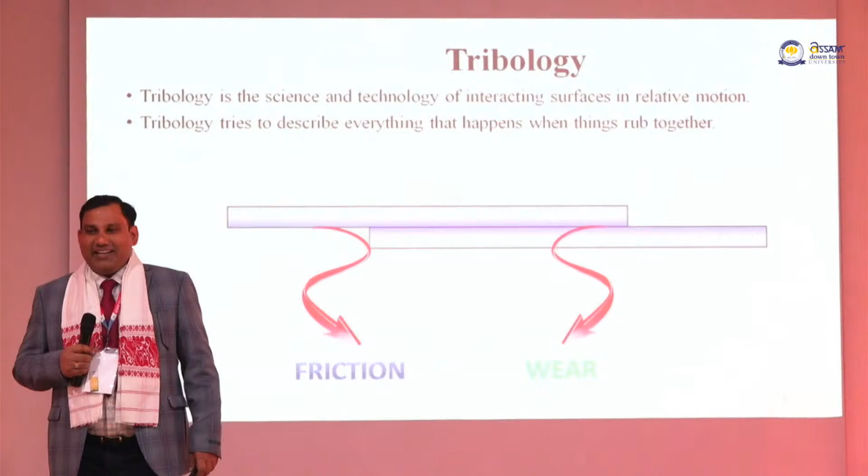In our life also wear and tear happens due to friction. So to cope with that, we can add lubricant in the form of solid, liquid, or semi-solid lubricant. Tribology is nothing but the study of three things: how we can overcome friction, how we can overcome wear, and what type of appropriate lubrication we can add at the interface.

Tribology is related to what you studied in engineering mechanics first year course, the friction, different laws of friction like Amonton's two laws and Coulomb's third law. So that is nothing new, only the name tribology came after 1960, after the Jost report in UK. UK industry formed groups and formulated a report known as the Peter Jost report. Before that it was just friction and wear, but after 1960 the term changed to tribology.

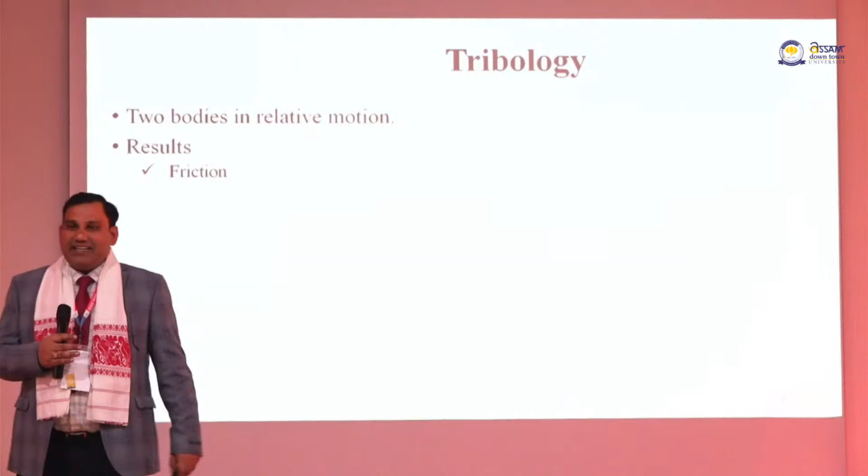When two bodies interact with each other, friction is generated, and due to friction, wear happens. So these are the important things when you are studying tribology.

It is a very important aspect in all fields of engineering, whether you are working as a civil engineer, automotive engineer, or electronics or electrical engineer. Take hard disks, how we can reduce friction in a hard disk, because nowadays mobile phones are also very compact in nature, your hard drive is also very compact. So when things become compact, friction is also very high, and adhesion plays a very important role.

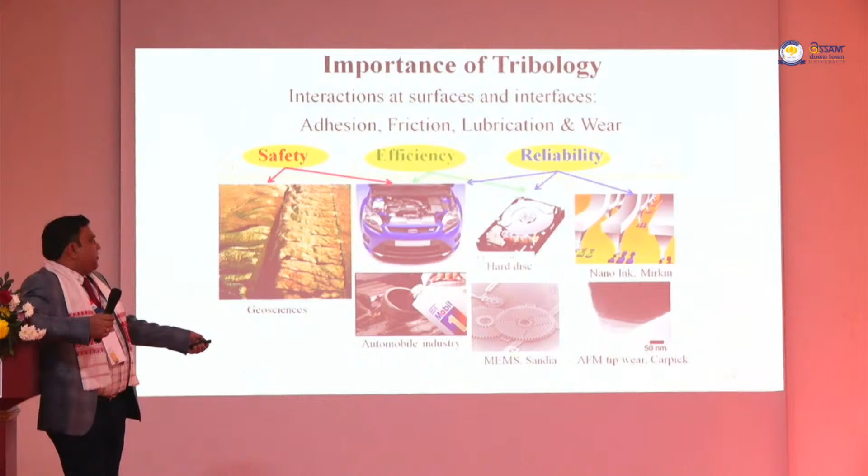So IBM or Intel invest billions of dollars in research to find the perfect lubricant for your hard drive, computer, mobile phones, and watches. Money is invested to reduce this tribological aspect.

Even when using nano-ink or micro-electromechanical systems, the best example is your car's steering and airbag system. When your car impacts something, that MEMS device, which is in nanometers, can immediately open your airbag. But sometimes if there is buildup in that device, even if you hit very hard, your airbag does not open because it is completely stuck.

So when you are talking about the nano scale, van der Waals forces, which are very weak in nature at macro scale, become very significant at nano scale. This is a very important aspect when studying friction and wear in nano scale rather than macro scale. At macro scale we don't worry about van der Waals forces, but at smaller scales, van der Waals forces and hydrogen forces play a very important role in tribology.

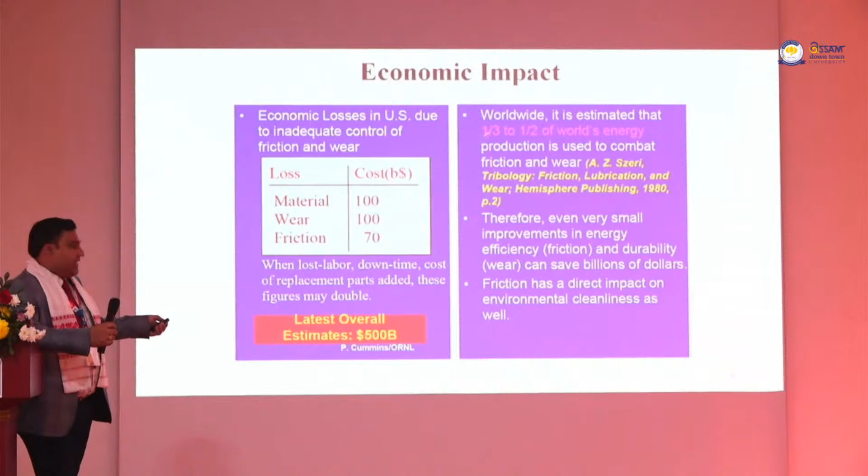This is from an economic impact report published in 2017 by the US. It states that every year, material loss due to friction and wear costs around $100 billion, wear and tear costs $100 billion, and due to friction system spills, maintenance cost is around $70 billion. So when you sum up all these costs, it is around $500 billion loss in a year if you are not targeting the perfect solution for the tribological aspect.

It can be said that approximately one third to half of the world's energy production is consumed due to friction and wear, and this contributes a lot to the GDP of any country. That's why this aspect is also very important when you are working in this area.

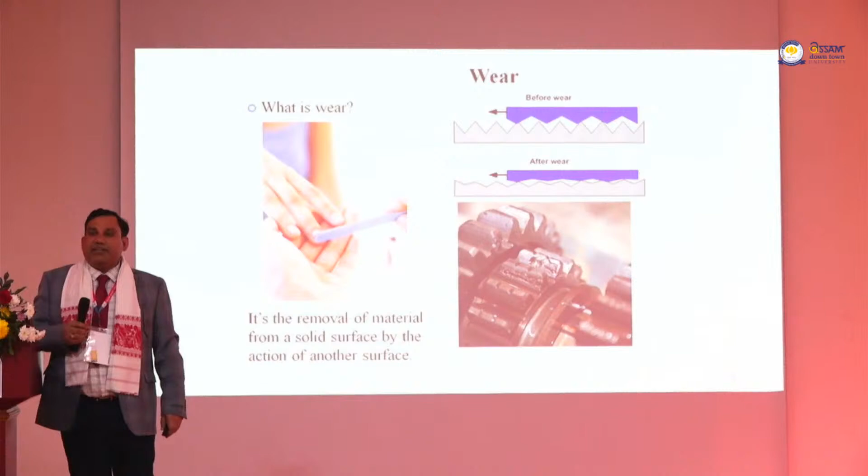After some time, you can feel such cavities due to improper lubrication in your vehicle also. You can feel the sound in your engine after some time because of poor maintenance, because of these types of craters generated over the surface.

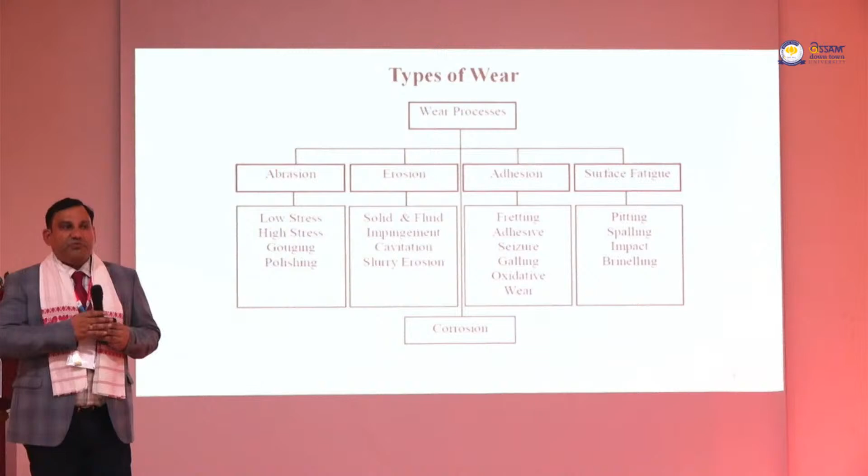There are different types of wear: abrasive wear, adhesive wear, corrosive wear, surface fatigue wear. Surface fatigue is nothing but when cyclic loading is applied, then surface fatigue occurs. In biotribology, it is mostly surface fatigue. Like when you move very frequently, cyclic load is applied on your bone, and after some age you feel pain in your bone. That is called cyclic loading, which is also a kind of wear.

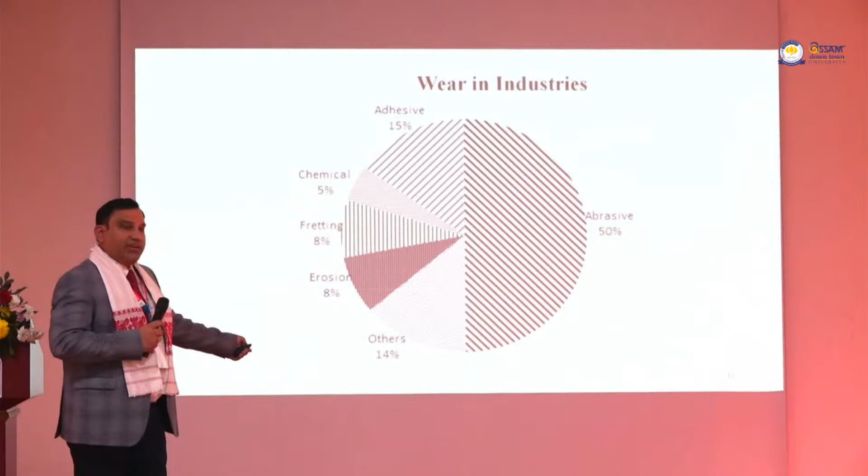When we talk about wear mechanisms, there are two types: two body wear mechanism and three body wear mechanism. The three body wear mechanism is better than the two body wear mechanism because there is less degradation of the surface. From an industry point of view, most industrial equipment fails because of abrasive wear, contributing 50% of maintenance, and adhesive wear only contributes 15%. Others are very less.

From an industry point of view, if you use perfect lubrication between machinery, then you can reduce this 50% maintenance cost. That is a very huge cost in industry.

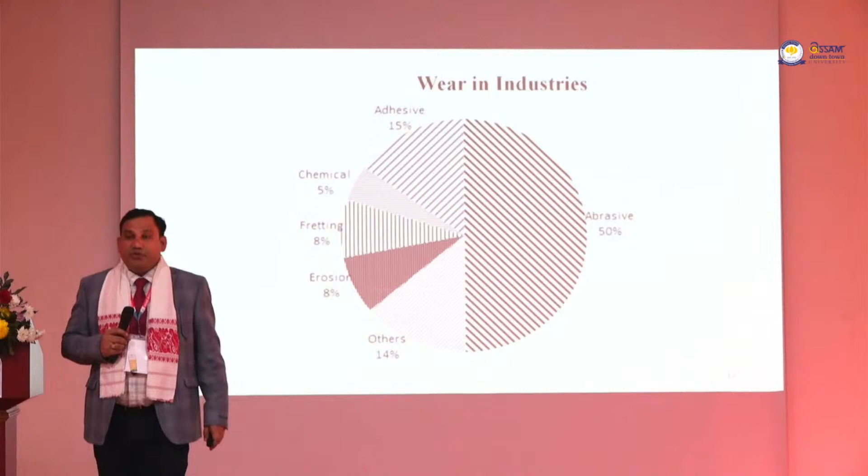Lubrication is nothing but there are different kinds of lubrication you have studied in physics, like elastohydrodynamic lubrication, hydrodynamic lubrication. So I'm not going into detail on that.

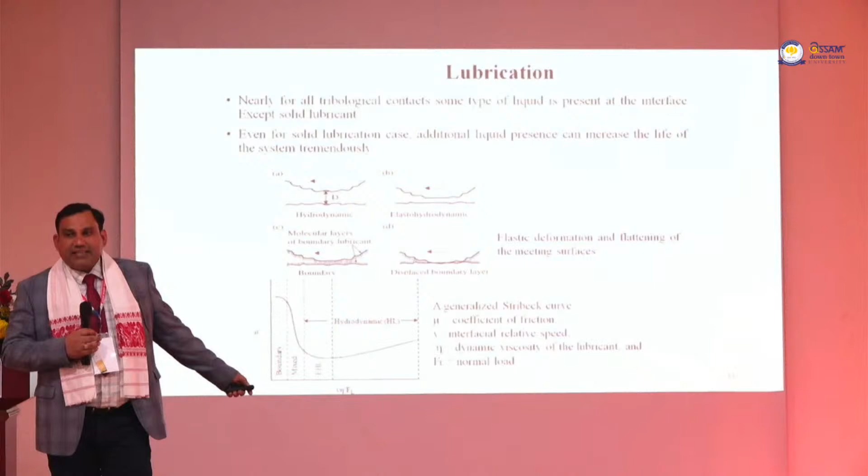This is the Stribeck curve. He is the German scientist, Richard Stribeck, in 1902. He understood the lubrication mechanism in industrial machinery, and he proposed the Stribeck curve showing how friction changes with the viscosity of the lubricant, the applied load over the material, and the velocity at which you're running your machine.

This term is known as the Sommerfeld number. In machine design, most probably you studied this Sommerfeld number, and how friction changes with the Sommerfeld number. That is also another aspect. It was developed in 1942, so relatively recently.

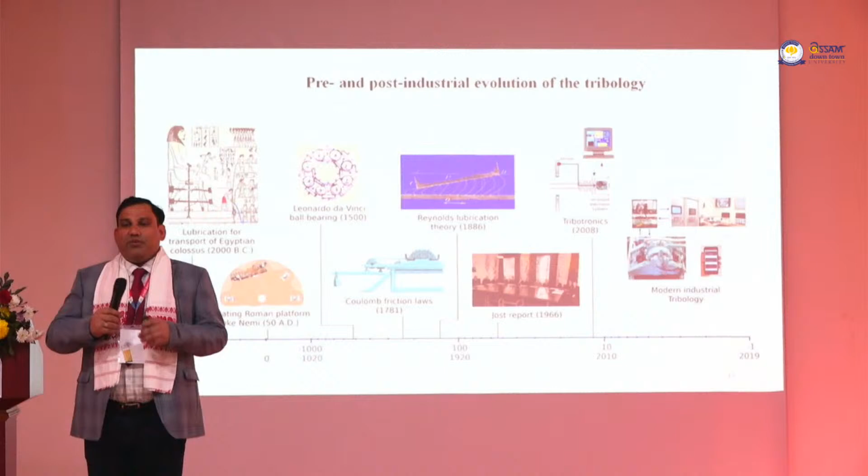We are talking about post-industrial revolution and pre-industrial revolution, how tribology developed from the beginning to nowadays in the 21st century. In the beginning, around 2000 BC, you can see here a person only used wooden cylinder blocks to move items. When you do it slowly, you can move heavy things.

Leonardo da Vinci gave the friction law sketches in 1500. Then Coulomb's friction law came around 1781. Then the Jost report came out in 1966, and the terms friction and wear changed to tribology.

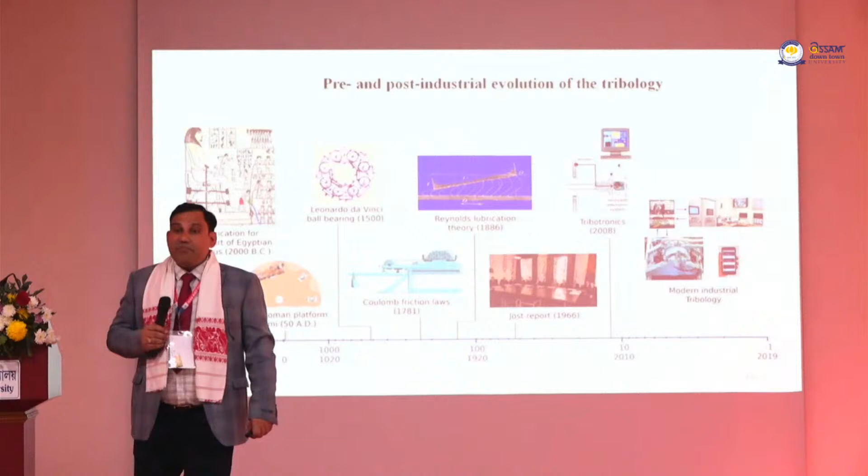After that, around 2008, Tribotronics played an important role. We added tribology with machine learning and artificial intelligence, that's why its name is Tribotronics. Computer science also plays an important role to simulate these tribological problems. Nowadays, in modern industrial tribology, we use Wi-Fi systems or optical fiber networks for condition monitoring of equipment running in industry.

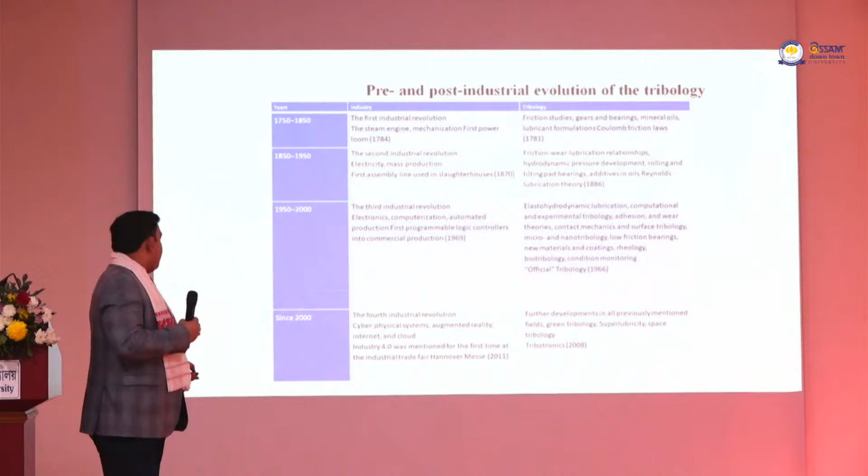Industries, the first industrial revolution came around 1750. So only studies on friction laws were developed in the first industrial revolution, focusing more on gears, bearings, and mineral oils. Slowly, as the industry revolution progressed, tribological aspects also changed day by day. Now we are moving into Industry 4.0, the fourth industrial revolution. Here we have to develop green tribology, super lubricity, and sustainable lubrication so that we can also protect our environment. That is the development in tribology in Industry 4.0.

When we talk about different terms, sometimes we require a high wear rate, sometimes we require low friction. So according to our application, we have to select the proper material needed in our system. For pencils, we require friction, only then can you write on paper. In an eraser, we require maximum wear, only then can you erase from paper. So according to the application, you have to select your material, and then you can play with different compositions and develop new material. That is also a biggest advancement in the tribological field.

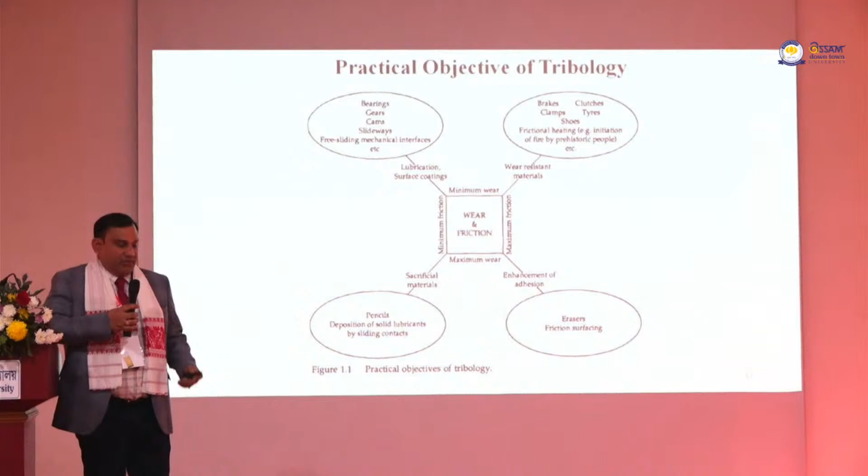So these are the different correlations of different theories developed since Industry 0 to Industry 4.0. Various theories were developed by different scientists, who developed different mathematical models to understand the properties of lubrication, interface, and wear phenomena. Nowadays COMSOL came into the picture, and you can easily simulate the two-body interaction.

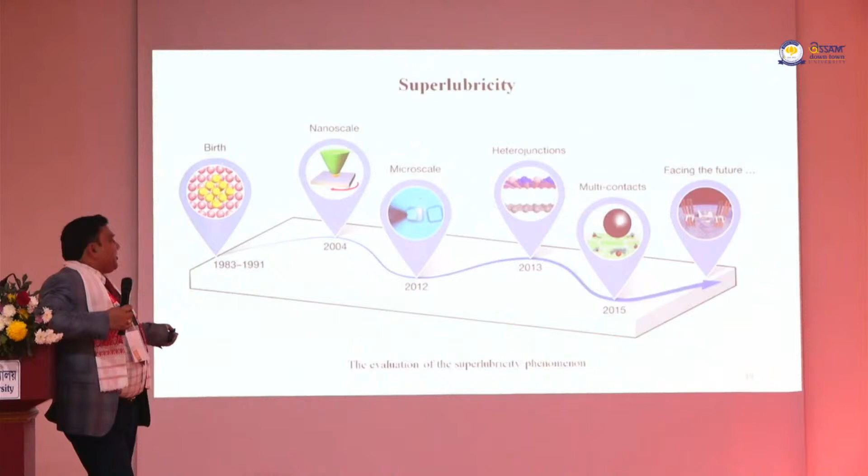Now another phenomena in tribology is super lubricity. This is a very fancy name, super lubricity. It is widely used in space research. When we talk about space, you are developing some satellites. In that state, we require very less friction, only then can your satellite sustain for a longer life. So in space, that is the field of space tribology. ISRO or DRDO has a very dedicated lab for this space tribology in their research center. That is also not developed very early, it was developed in 1983. The birth of super lubricity is 1983.

Now we have to move to different scenarios in super lubricity. Basically we are focusing on liquid based lubrication which can banish your friction, like in our body. In our body, it secretes synovial fluid which creates low friction in your joints. When friction is generated high in your joint, you feel pain, either in your knee or hip joint. The friction in our body is 0.0001. If it is more than that, your body will feel pain because it is not generating sufficient synovial fluid, and your joints come in contact frequently causing pain. So sometimes the doctor will put an injection as a painkiller, which creates a lubricant film over the surface, and you cannot feel any pain in your joints. So that is a kind of lubrication in the body.

This is an example of how we develop super lubricity from nanometer range to meter range, with applications in real life. When we talk about electrical connectors in railways, this requires super lubricity so that the railway wagon can be moved very frequently. If friction is high, it cannot be moved, it can stick with the wire. So in this area super lubricity is required. Bearing areas also require super lubricity, because most components used in a spacecraft use so many bearings, and those bearings need to move with less friction, only then can it sustain in space, because maintenance cost there is very high. These are the different applications of super lubricity from nano scale to macro scale.

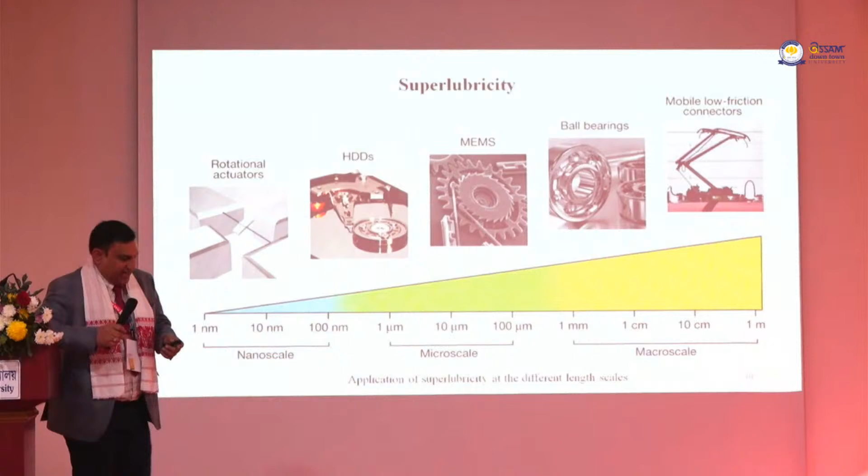Another area is in situ lubrication, where in a smaller or nano scale component like MEMS or hard drive, we can't use any external lubricant. So we have to generate a coating which can self lubricate at the interface. This is known as self lubricating coatings.

Here I have developed a polymer. In that polymer coating, I have added some weight percentage of perfluoropolyether lubricant, and you can clearly see that after 4 lakh number of cycles, even though there is no displacement of the material, only the top layer of the lubricant displaces.

So these are the samples. You can clearly see at the interface the lubricant film which is perfectly there. So after 4 lakh number of cycles running continuously for 24 hours, the samples did not fail.

That is the kind of in situ lubrication used in your hard disk, mobile phones, because there you can't give any external source of lubricant. It is an internal source. When your lubricant runs out, your hard drive will crash, your computer will crash, even your motherboard can crash, because of improper lubrication. So that is the principal lubrication mechanism.

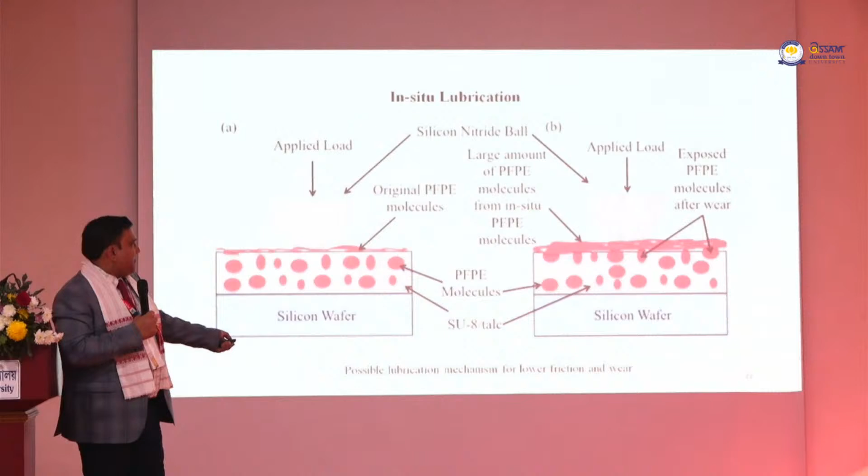When you apply the load, whatever lubricant is there inside the matrix comes out and makes the tribo film. So that is the simple schematic mechanism we have proposed for that particular in situ lubrication.

As I told you, space tribology is another field of tribology that can impact humans widely. We are using solid lubricant and liquid lubricant in space research centers to reduce the friction between components. Then another widely used area of tribology is human biotribology.

Metals cannot sustain in our body, and they can become toxic in nature, and you can get some other type of disease in your body when metal interacts with your tissues. So we are mostly using polymer nowadays as a coating to replace metals at direct contact with your body tissues. That is the field of biotribology.

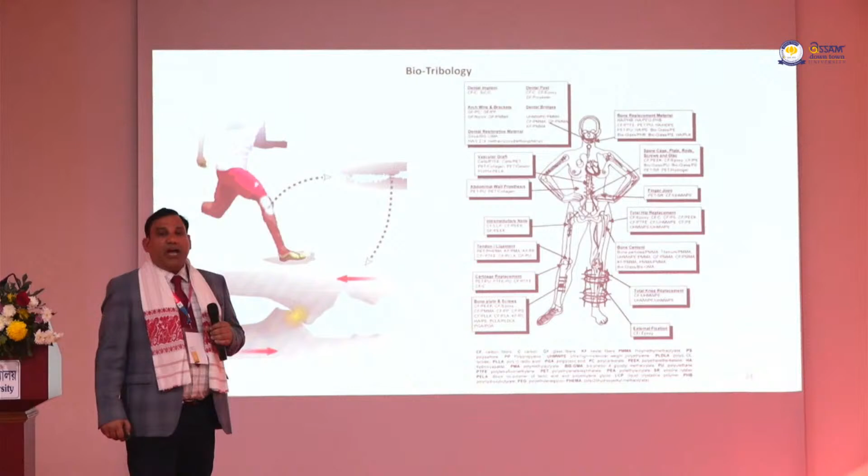When any person is running very fast, after some age, he can get an arthritis problem, because your synovial fluid, which is generated, and your bones get completely stuck with the surface of another bone. These two bones, like the femoral bone and the bottom bone, interact and become joined. It is kind of cold welding, and when you apply more force, you feel so much pain you can't move your leg.

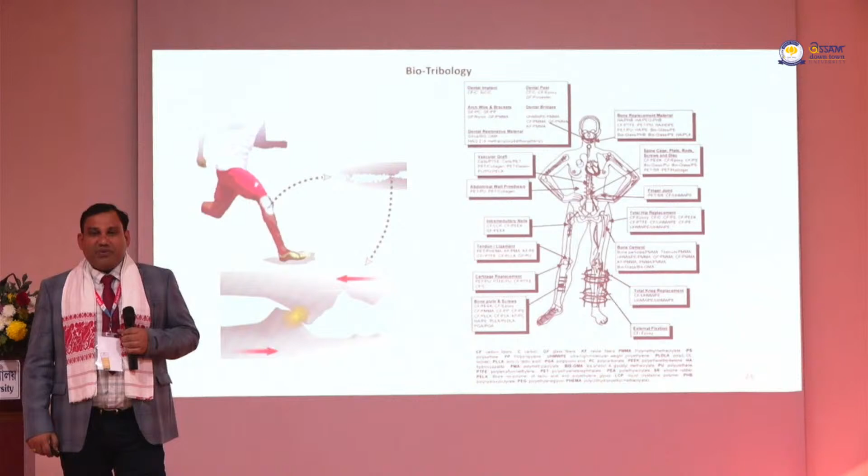So runners who run very fast, or fast bowlers, always have to get operations on their knee or these types of joints very frequently, after 5 or 6 years, because their bones become completely cold welded to each other and cause pain. So that is the kind of biotribology.

That's why I'm telling you tribology is an interdisciplinary field, and you can enjoy tribology because it is a very interesting field also. Another thing you never thought about is how much nature gives you ideas - that is biomimetics. Nowadays biomimetics also plays an important role in developing biomimetic surfaces.

Here you can see a lotus leaf, with such nanotextures present, and the lotus leaf has self cleaning properties. If you just drop something, it cannot stick to the lotus leaf. Because of this...

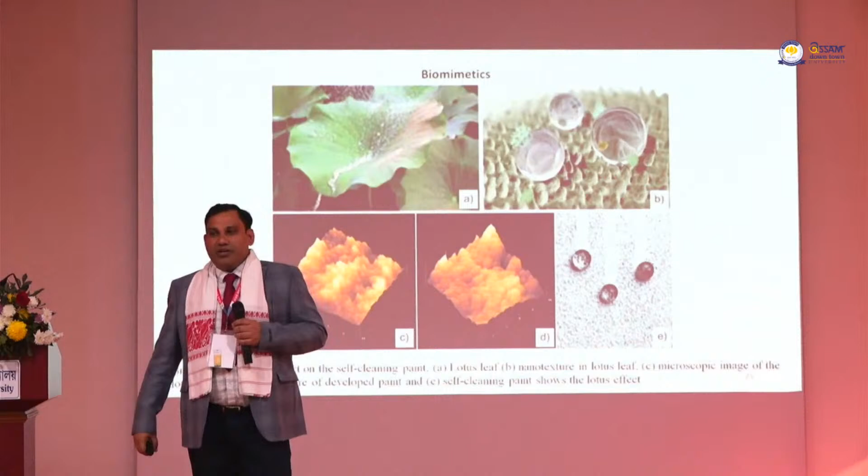Whatever we have seen in nature, as humans we have developed so many things like self-cleaning paint. Nowadays advertisements are also coming for self-cleaning paint - no dust will stick to your paint. Companies are doing so much in that particular paint. Another is called self-cleaning glass.

If your building is 20 stories, or 25, 30, 150 stories, how can you clean the glass from outside? So we just use these self-cleaning hydrophobic coatings. It is directly self cleaning - you just drop water and it cleans, and nothing sticks over the surface. So that is one example.

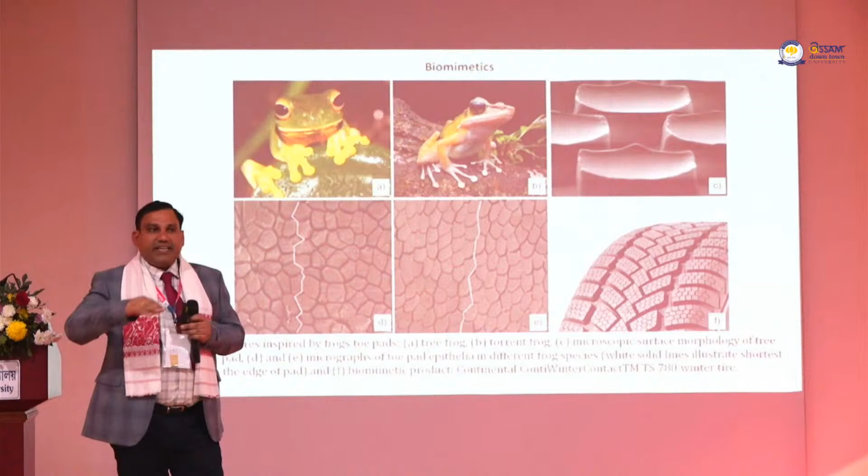Another example you can see here is the frog. This gives the idea for tire design. When you look carefully at your automobile, you can see the rear tire texture is different than the front tire texture. This is another application of biomimetics because it can stick anywhere - so that your tires stay stuck to the surface and don't skid, otherwise you can feel more slipping. That is another area where you can see these types of textures in your tires.

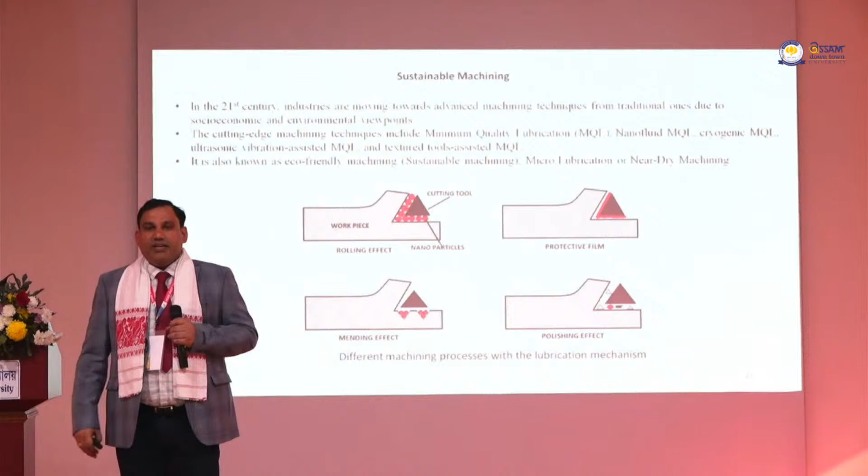This area is also very important, and so much studies are going on developing different bio cutting fluids, different surfaces of tools through biomimetics. That is another area of sustainable machining.

And then the last area I can say is electric vehicles, which are becoming popular, and a lot of research is happening in electric vehicles.

These are the areas where tribology plays an important role, like when you purchase a battery. Your battery life depends on this because electrons are flowing, and this can corrode the material. Battery cells will be corroded faster, so we have to develop battery cells and fuel cells so that they cannot be corroded.

If your battery life and maintenance is reduced, that's significant because 80% of the power is generated by the battery. If your battery life is only one year, then every year you spend more money to run your electric vehicle.

Another aspect in electric vehicles is the steering system, because there is no IC engine there. So in the steering system, there is a lot of friction - how do you control your steering system? Then electric motors - how do you control your roller bearings, your windings, whatever windings you are doing in the electric motor - that is also very important. There, electric friction plays an important role in electric windings.

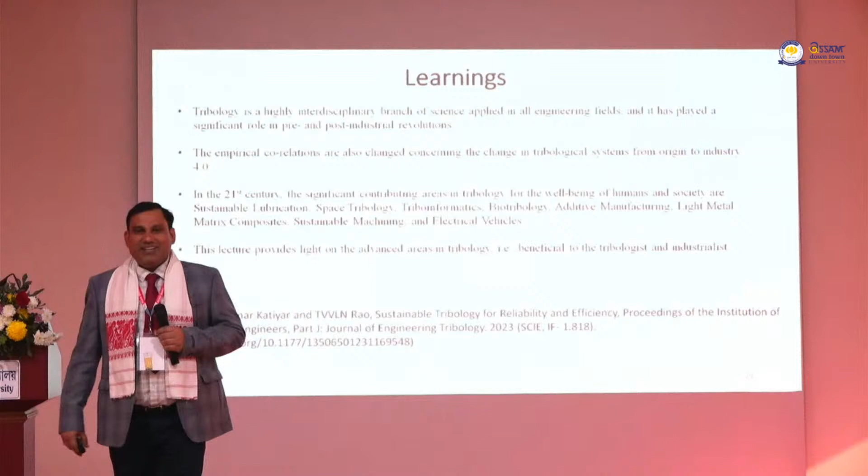Thank you very much for patiently listening after lunch. That is a very tedious task, to wake up everyone after lunch.

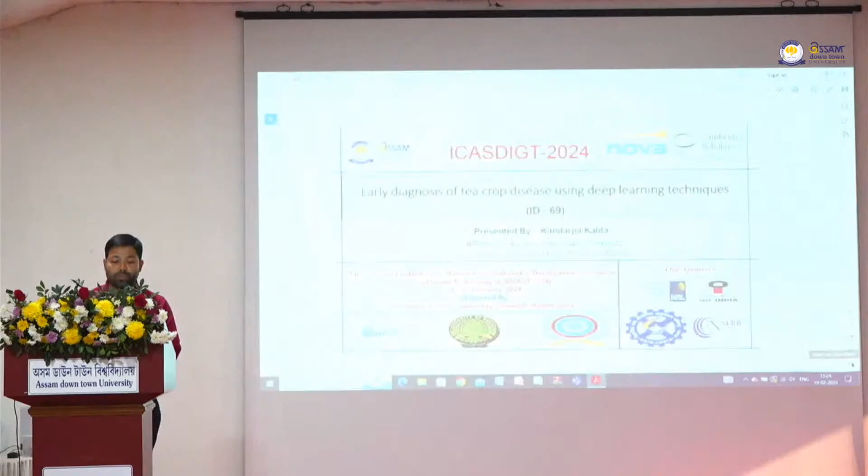Thank you, ma'am. Respected chairperson, co-chair, dignitaries, fellow researchers, and my colleagues. Myself, Kandarpa Kalita from Assam Downtown University. For the last few months I have been working on this topic, early diagnosis of tea crop diseases using deep learning techniques. As a part of this research work, I have received some results, and I would like to present these results and my findings at this conference platform. This paper is co-authored by Dr. Aniruddha Deka sir and Professor Sunandan Borua sir.

This is the outline of my presentation. I will start with the introduction, problem description, objective of this work, then the methodology I've applied, then the findings of my research work, the conclusion, and then some references.

In the introduction, whenever I look at the different crops grown across the country, tea is one of the crops grown mostly in the northeastern area, and you can say that most of the tea produced worldwide, a major chunk comes from our land here. So there is a need for some attention to be given to that crop, which is useful for better yield.

When I visit different tea estates throughout the state, I find that although farmers are choosing the best variety of crop to be planted in the garden and giving the best care, due to some different factors, it may be environmental or any other, tea crops are very much prone to diseases and different insects infect those crops.

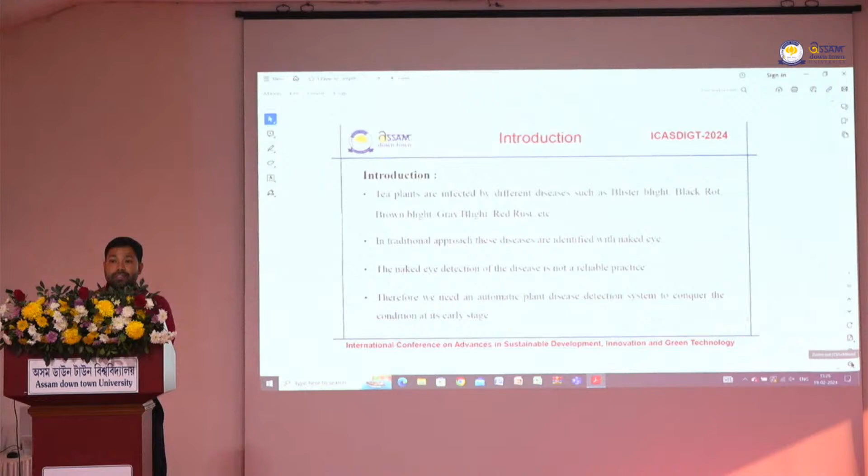So in today's days, if we go to the crop, we'll find that all this disease detection and whatever recommendation for remedies are there, these are all based on traditional approaches. Expert farmers and plant pathologists visit that place, and using the naked eye, they identify the symptoms, and accordingly identify the disease and the recommended remedies.

These practices are useful or workable if the number of areas where tea is planted is less. But in practical terms, we can see that as tea is an important crop throughout the world, the number of areas where cultivation is going on is increasing. So this naked eye or traditional practice is not a fruitful one.

So to overcome this problem, we can say one automatic system is the need of the hour. One automatic system, maybe based on an Android mobile phone, will capture the image, and based on the analysis it will tell us what disease this is and what will be the recommended remedy for the disease to be conquered.

During my study, I find that the Plant Protection Code, which is a body formed by the FSSAI from Government of India, has made it obligatory that a product, it may be tea or any other, can go to the market only if the number of chemical residue or pesticide residue is within a permissible limit. But we find that if that residue is not up to that mark, then the entire product is going to be rejected.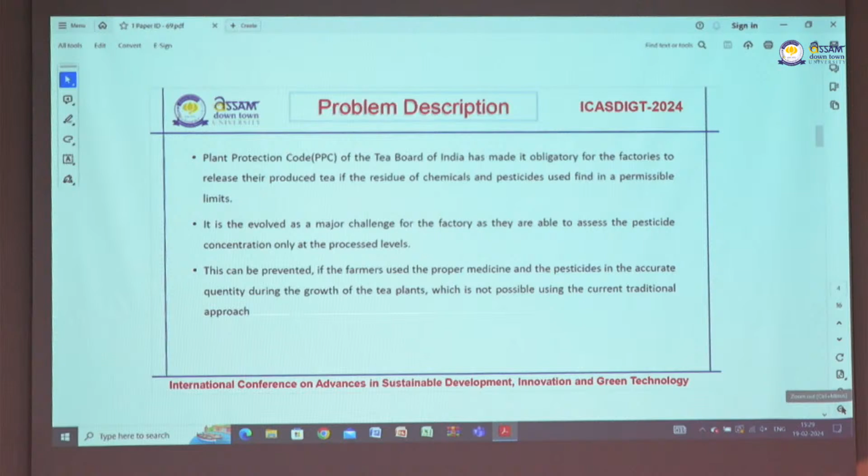Towards the mitigation of this problem, we can suggest that if the farmer knows in which quantity the pesticide should be sprayed, then this type of problem can be mitigated. So actually this is the core aim of this research work.

In this work, I'm in the middle of my PhD work. Right now I'm trying with different existing convolution neural networks, which are used for the classification of this type of problem statement. Here I'm applying 3 transfer learning architectures: AlexNet, Inception V3, and faster RCNN. During my literature study, I find that these 3 transfer learning methods give us the maximum number of results in case of the tea leaf.

Apart from these 3, one traditional architecture is also used: this is support vector machine. As a part of my research work, I have applied all these models to my dataset and found some results, which I want to present before the audience.

As a part of the methodology, first of all, I have to collect the dataset, because as it is an image processing problem, without images we cannot go for this. As a part of the dataset creation, I have collected a dataset which is publicly available in the Mendeley dataset, consisting of 120 images of this dimension.

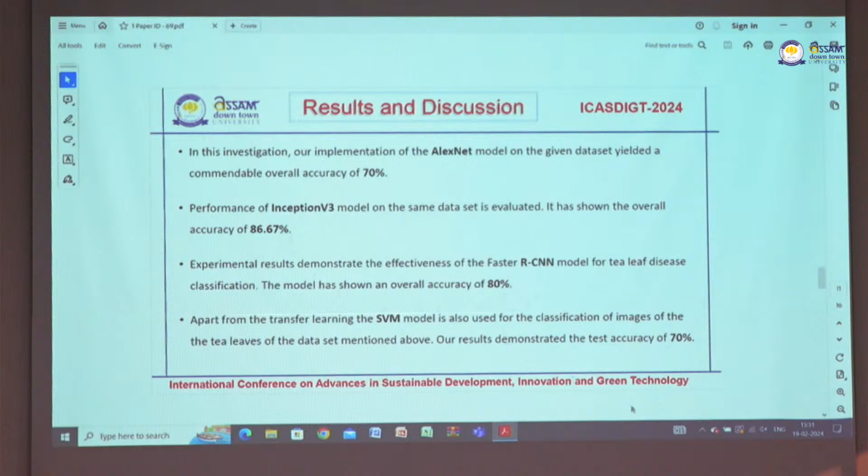The model applied is the SVM, next AlexNet, Inception V3, and Faster RCNN. I find that AlexNet architecture produced 70% accuracy in the validation, and among all four architectures, Inception V3 shows the best result, which is 86.67%.

As a conclusion, I can say that Inception V3 gives the best result - sorry for the mistake, it should be 87 or something like this. So this is all about the paper. These are a few of the references I've used. Thank you.

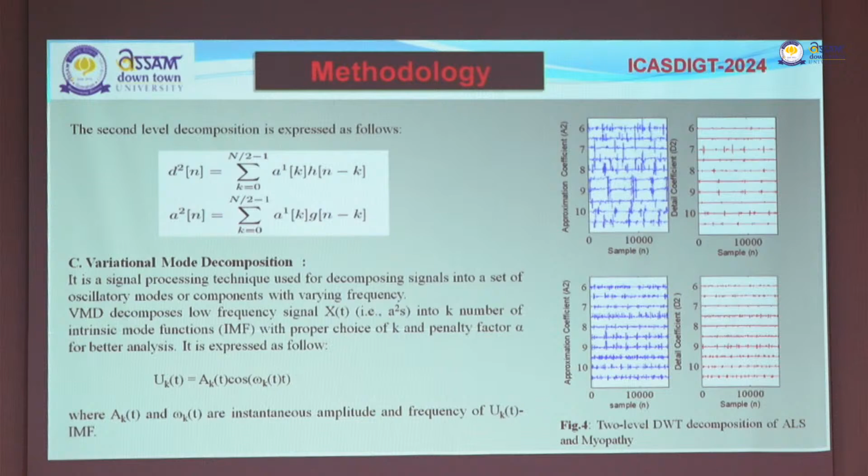From our research, we found that using DWT with VMD can improve the decomposition quality, enhancing multi-scale analysis and facilitating interpretation of the signal.

These are the references. Thank you.

Thank you very much. So any question from the audience? No question? Okay, fine. Let me ask you one question only.

You are the PhD scholar. Yes, sir. So you have taken wavelet transform. Yes. Also you have taken VMD. Yes, sir. Have you heard about EMD? Yes, sir. So what is the difference between these two?

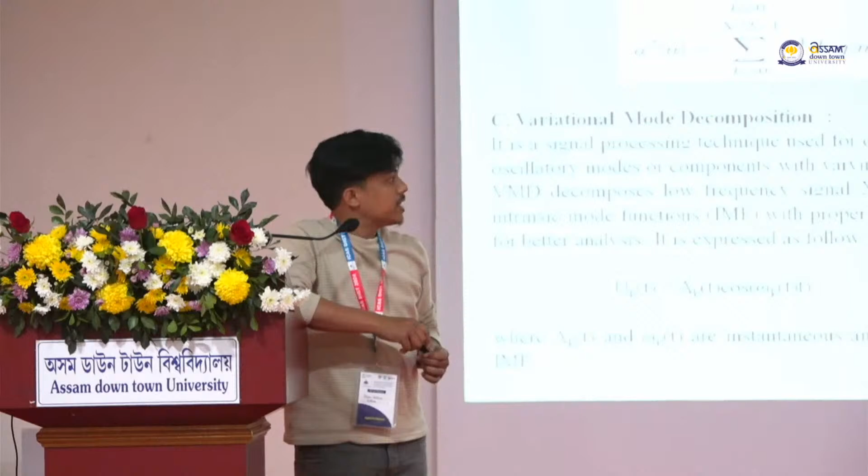Second thing, you have taken wavelet. Yes, sir. 2-level decomposition you have taken. Yes, sir. Am I correct? Yes. So next you have taken VMD. Yes, sir. Why? Sir, so that the DWT is sufficient to generate the features. Then why VMD again? Sir, for finding the fine frequencies, fine frequency mode level, for finding that.

Please check again. You are the PhD scholar, no? Okay, sir. Please check again. You see DWT, if you are considering, what is the mother wavelet you have considered there? DB4, sir.

DB4, you can check with biorthogonal. You can get a better result for biomedical signals. Yes, sir, could you follow me? And if you want to take VMD, please consider EMD first, compare it with VMD, not DWT with VMD.

So if you have taken the DWT components, have you obtained the IMFs from the raw signal? Not the raw signal, we have first used the DWT. You see the IMFs, those are not the IMF, sir. Right side, what are those? These are the signals collected from the DWT.

No, right side red signals, what are those? For detail coefficient with high frequency, we have negated these signals. High frequency, from where did you get it? EMD has no high frequency. What is the highest frequency, sir, in EMD? From the raw signal, we have collected this.

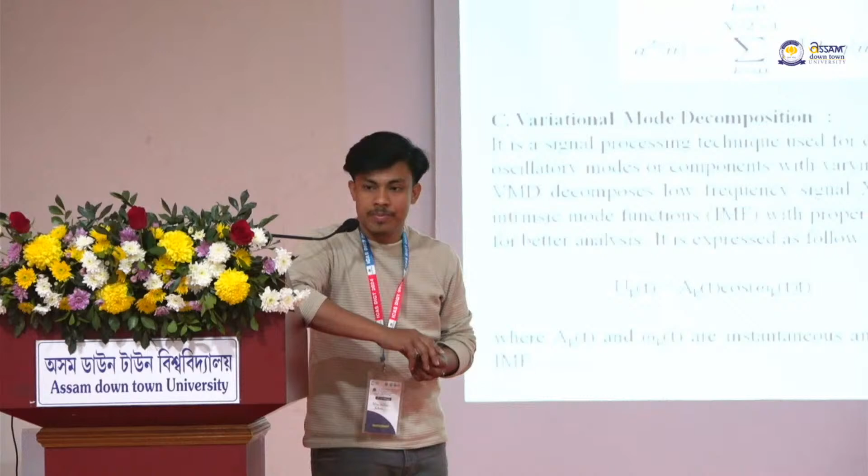So as per my knowledge, correct me if I am wrong, the frequency signals are denoted by capital X of either e to the power j omega, or omega, whatever. So you cannot write capital X of t, where t is the independent variable there. If t is there, that means that's a time domain signal. Correct me if I am wrong. Yes, ma'am. Okay, so if that is the case, I think you should correct that. Okay, ma'am, thank you. Okay.

Please check, can you go to your conclusion and results slide once again? Okay, my question is, the first point which you have written is that you are integrated into several ensemble learning models. No, ma'am. Okay, so basically are you using all of them together as an ensemble? That point is not clear. No, ma'am, we have not used them all together, we check it separately.

Because KNN inherently, if you use it as a single model, is not an ensemble. So are you using several KNNs together, is that what you mean? Yes, ma'am. Okay, so that needs to be put better, because it's not very clear. Okay, ma'am. Thank you, everyone.

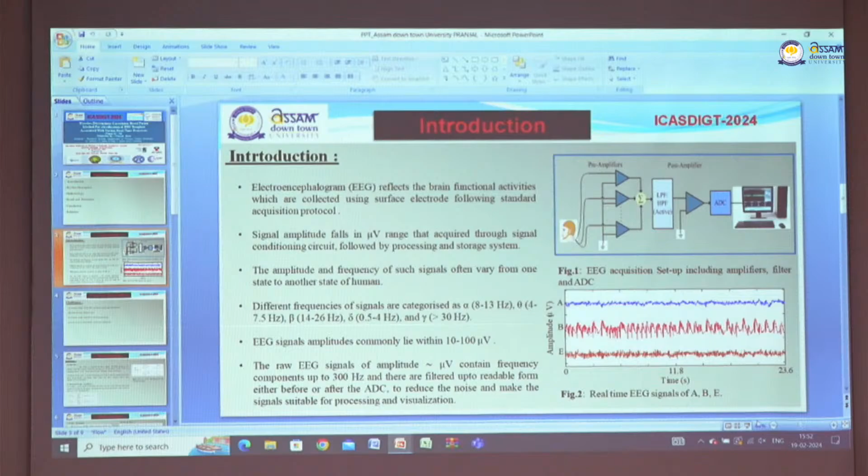First, the signal is collected from the brain and fed to the pre-amplifiers. Pre-amplifiers are needed because brain signals are very low in voltage, so they have to be amplified to make them readable and feasible. After the pre-amplifying stage, the signal is composed, meaning combined to form a single data stream.

That data is fed to high frequency or low frequency active filters, which separate the signals into high and low frequency to reduce noise. Then, after analog to digital conversion, it's fed to the computer screen and analyzed with the help of MATLAB and other software developed for analysis of EEG signals.

Now, the next question is, what are the challenges in the study? The first challenge is the involvement of a large volume of data associated with real-time measurement. That means when we collect the data, there are a large number of frequency signals containing many features which are different in character.

The next challenge is high dimensionality of feature space, where features are more than the observations. Some signals contain frequencies which are really needed, some are of less importance, and some are not important at all, but all are contained in the same frequency domain. That's why it's called high dimensionality data, and this is one of the challenges: to collect less data to find more results. The third one is the involvement of large constraints in existing methodology.

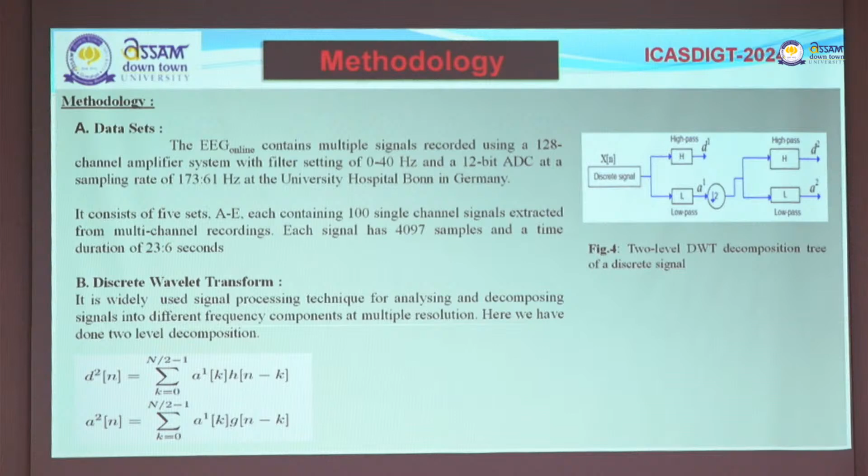A 3-fold cross-validation strategy is applied, where 1 set is used for feature extraction and the rest 2 sets are used for model performance, using advanced ensemble performance boosting, bagging, and boosting, an RS model embedded with CC and DAC based statistical features. That means statistical features are used to check whether reliability is increased, remains the same, or is enhanced.

To set this up, some statistical measures are taken: ANN, rotation forest, random forest, classification and regression tree, decision tree, k-nearest neighbor, deep learning, C4.5, LADT, etc. By introducing strategies like bagging and boosting.

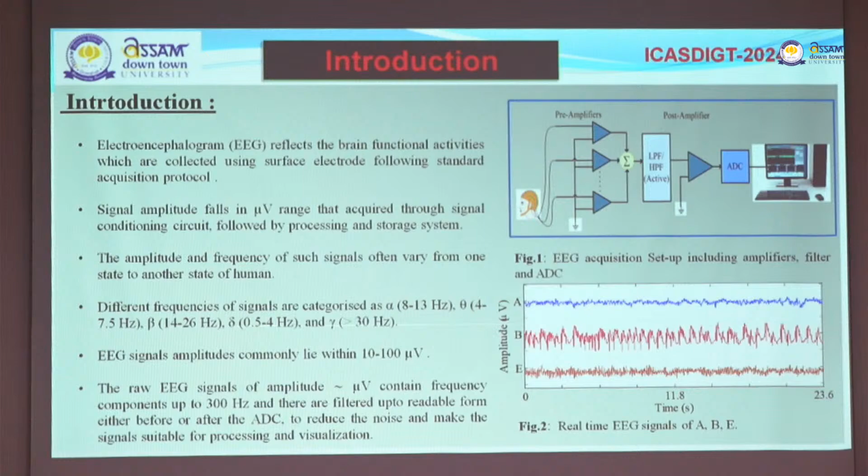Because everyone is using it, I'd like to know why. Why have we used the discrete wavelet transform? No, why do you use the wavelet transform? So what is advantageous about it? What is it, sir? Right, I understand this one - what is the advantage of using the discrete wavelet transform?

Wavelet transforms are used to separate the signals required for analysis of EEG signals. Let me make this question simpler. So you have used DWT. What are the other methods that can be used in place of DWT, and why do you consider DWT superior to all the other methods?

Is it clear now? Clear, but madam, I have only used this method, DWT, because I am at a very early stage of my research. I only used DWT. Now what other methods are there? Can you tell me?

WT, DWT, FWT. Another method is FWT. No, what such transforms like wavelet transform you have not used, that's fine, but what other transforms do you know? Fourier transform, wavelet transform.

In recent years, there have been very catastrophic effects by earthquakes all over the world, challenging the civil engineering community to move toward performance-based design, where risk and losses are predicted to improve building functionality. Seismic-based design codes have been adopted recently worldwide, but prior to that, we had non-ductile buildings.

These buildings were designed before seismic codes were introduced, so they are at very high risk when exposed to seismic forces. Also, over their service life, they are exposed to deterioration such as environmental stresses, and the risk increases multifold when exposed to earthquakes. So identifying performance limits of these structures is necessary so we can plan repair and retrofit.

Coming to environmental stresses, chloride-induced corrosion is one of the major factors affecting RC structures near coastlines. It can lead to rust formation in the reinforcement, causing volumetric expansion inside the concrete that reduces the cross-sectional area of the reinforcement bar and effectively reduces the cover, leading to cover cracking and spalling of the cover concrete.

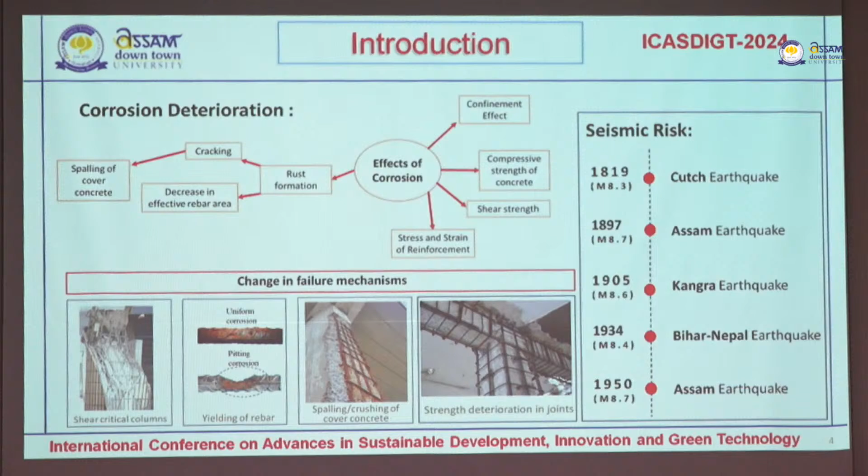Sorry to interrupt you, but could you just pass over these things and move on to your results slide? Okay, yeah.

I have adopted finite element modeling to do the analysis. Here we identify performance levels based on local damages, which are mapped to global damages based on slight, moderate, extensive, and complete damage states. We consider various input parameters, including concrete strength, reinforcement strength, and mass loss, to correlate with the damage limit states.

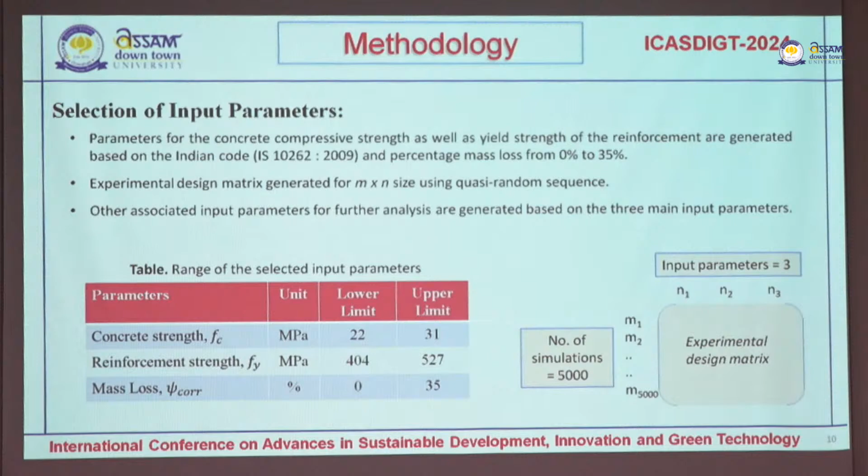We used these input parameters with 5,000 simulations to generate the parameters. After generating the damage states, which are correlated with global damages, we developed simple prediction models helpful for regulatory authorities and common people, using compressive strength, reinforcement yield strength, and corrosion level to predict damage levels.

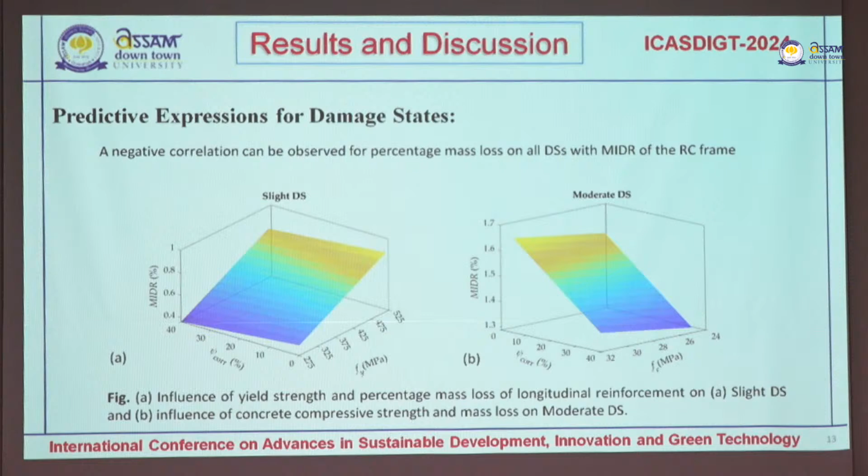Using this prediction model, we applied polynomial response fitting models. Here we see the correlation between yield strength and mass loss due to corrosion, which correlates to the maximum interstory drift level that maps to the damage state for both slight and moderate damage states.

Thank you so much. So, any question? No question? No.

So, what is the model you have used here? We have used a polynomial response surface fitting model.

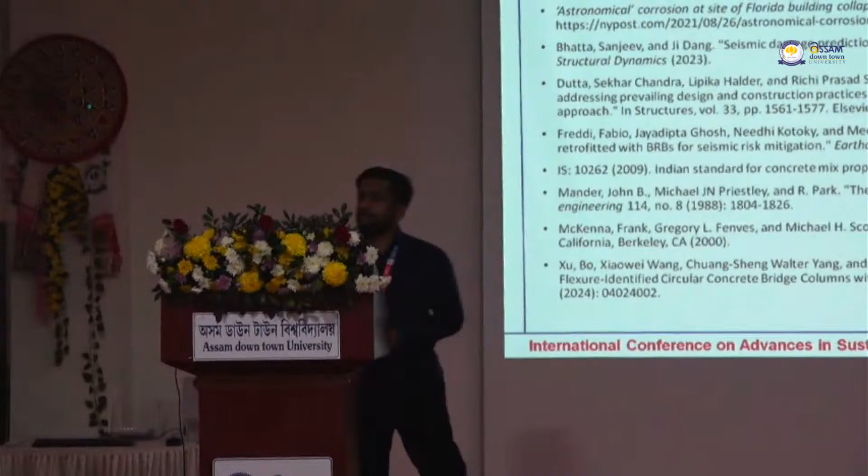Go to that model, please. I have explained the model here. It's the expression we have developed. Polynomial response surface model.

What is your platform of work? What is the software you have used here? MATLAB, sir.

But how is it related to finite element method? Here we have used parameters where we consider variations - compressive strength, concrete reinforcement strength, and corrosion level. We have tried to map it to certain levels of structural damage. Using these parameters, we can predict the structural damage that is intended to happen in a building, as per the corrosion level and the variation in material properties. For that, we have used finite element modeling to do the simulation, because experimentally it's not feasible.

We have tried to simulate 5,000 simulations of the finite element model where we generate the damage limit state, and we try to train the model.

But you can change that polynomial part to exponential as well. In future, that could give even better results. Okay, thank you very much. Thanks.

First, let us have some idea from where I belong. I belong to the State Technical University of Uttar Pradesh, one of the largest affiliating technical universities of India. We have more than 750 colleges affiliated with us all across UP.

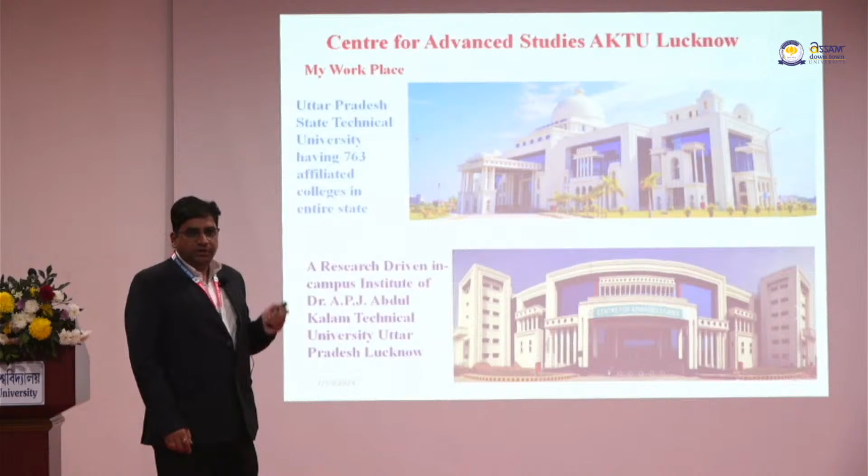This is the center where I am working, located in its own campus. The upper one is the administrative block, the lower one is the Center for Advanced Studies, where we have PG and PhD programs. I am Dean Academics of this particular center.

We have MTech in Mechatronics. All the PG programs are interdisciplinary programs. We also have a PhD program in our own center, where we give one of the highest scholarships to students per month. These are the research labs.

Google has invested 1 lakh US dollars in our campus to establish its own lab, the Google Developers Code Lab. This is the artificial intelligence lab with a 5 petaflop server. We also have nano centers. So we have more than 17 state-of-the-art research labs, and we do research in all these areas with the help of MTech and PhD students.

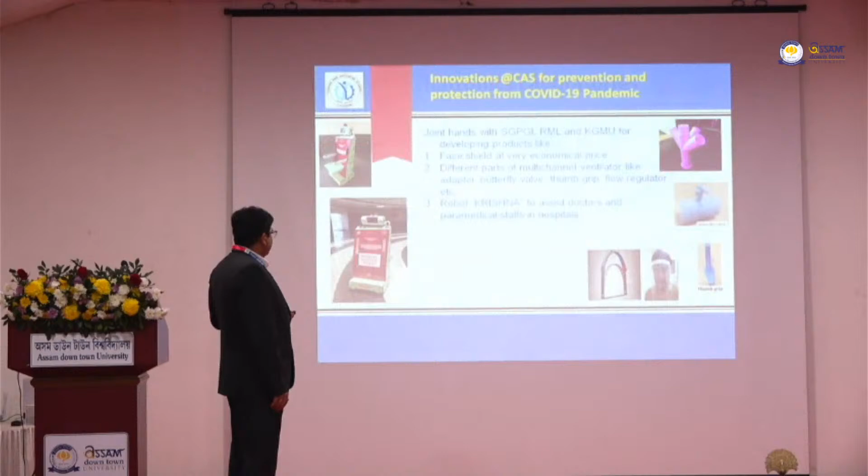Let us come back to the topic, keeping in mind the time constraints. So what is nanotechnology? Everybody knows nano means 10 raised to the power minus 9 meters. If we measure anything that can be treated as nanotechnology, any one of the dimensions should fall in this particular category, it should be less than 100 nanometers.

I am talking about the application of nanotechnology in the machining area. Nanotechnology has a lot of applications in all areas. You can do nano coating on fruits and vegetables just to increase their life. You can make a coating of nanotechnology, a nanofilm, over any particular body to make that body wear resistant and scratch resistant, etc.

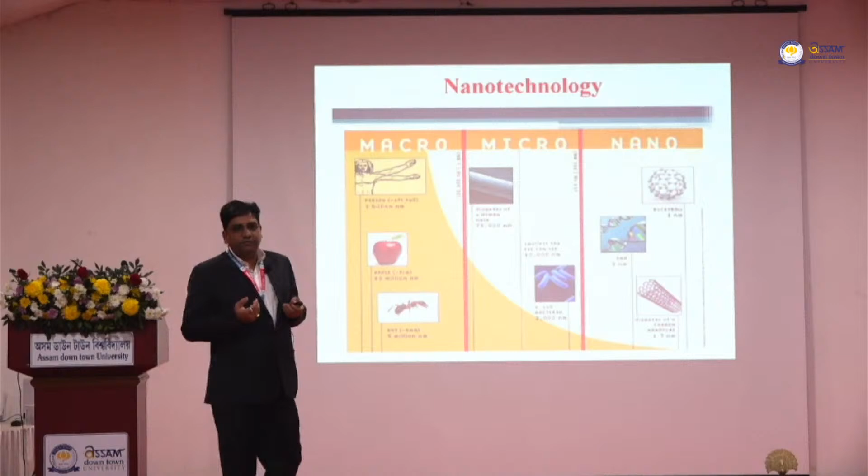Nanotechnology has a lot of applications in the medical field also, but I have tried to find out the way by which we can make the cutting fluid more sustainable and move towards the green technology goals.

Everybody from a mechanical background might have some idea how the turning operation is done on the lathe machine. There is a relative motion between the cutting tool and the workpiece. In turning, we keep our workpiece rotating while we keep the cutting tool stationary, having only rectilinear motion, so that we can have a shear action of the material and material is removed.

There are 3 basic zones in which heat is generated. Our aim is to minimize the heat generation, or to keep it within the permissible limit, so that we can keep the sharpness of the tool at a particular level, to enhance tool life and reduce tool wear.

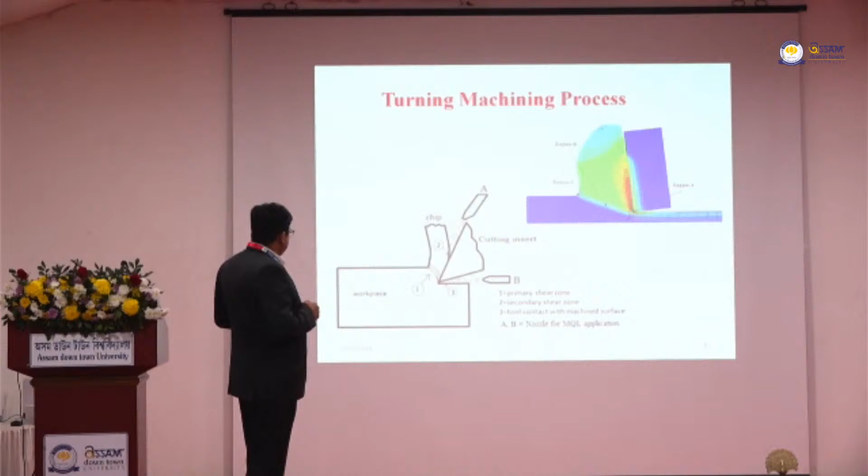The important zone is the primary shear zone, where the maximum shear action takes place. Then second is the secondary zone, where when you put the force of the cutting tool, due to the relative motion between the workpiece and the tool, there is a shearing action taking place here, and the sliding of chip over the rake face of the tool is taking place.

Due to the rubbing motion between the chip and the cutting tool, heat is generated, and our aim is to provide convenience for the chip to slide over the rake face of the cutting tool in an efficient and effective way, so that the optimum level of heat is generated. For controlling this heat generation, there are different techniques which can be employed, but the basic material used by industry is the cutting fluid.

So I'm not going into the detail. This is the classification of cutting fluids. You can see cutting fluids may be classified into various categories, but I have focused on the highlighted one.

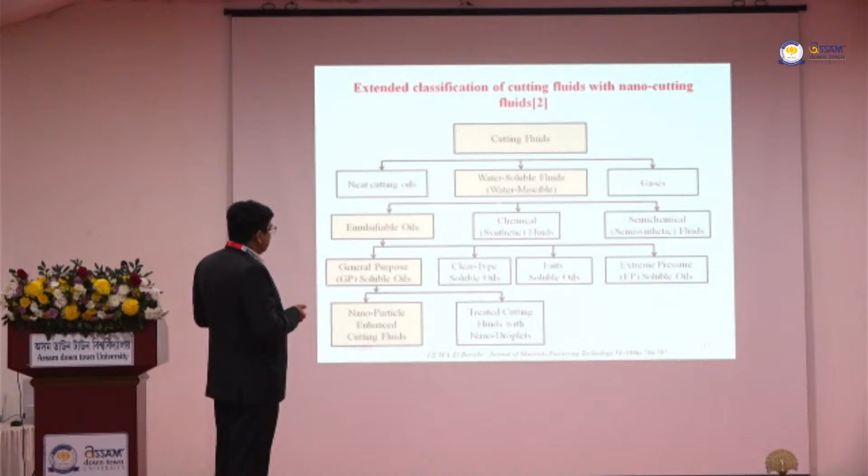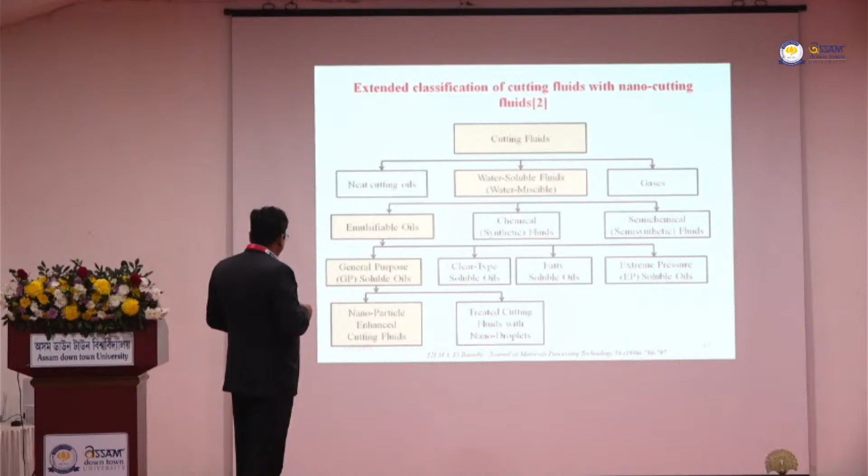So cutting fluids, we can say, are water soluble fluids. We added some vegetable oil or natural oils into the water to enhance its lubricity, because water has good thermal conductivity but no lubricity. So to enhance the lubricity of that liquid, some oils can be added, and for this we have focused on nanoparticle enhanced cutting fluids.

So there would be some questions coming in your mind, so we'll address those one by one. What is the motivation behind this topic? Why have we taken this topic as our investigation study?

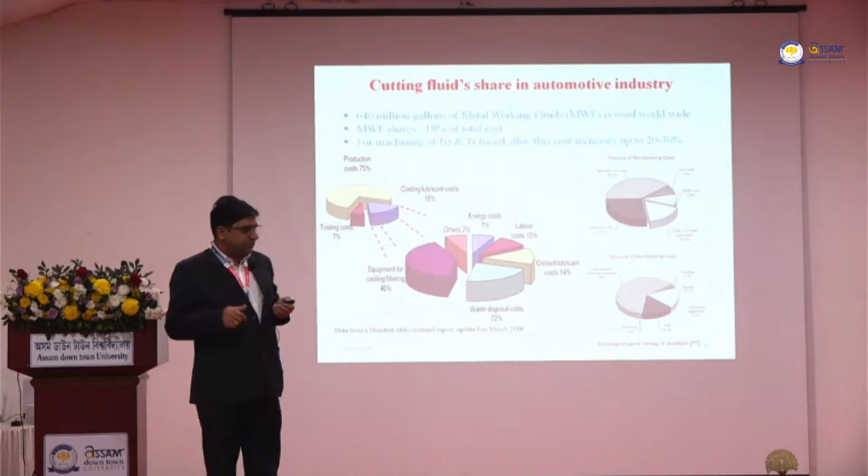So you can see from this survey, the total cost of any product manufactured in industry has different components. You can see 18% cost is the coolant or lubricant cost, because in any metal industry, an enormous amount of cutting fluid is used. So 18% of the overall cost - if 100 rupees is spent to manufacture any product, 18 rupees is a very high segment.

If you see the bifurcation of this 18%, waste disposal cost is 22%, equipment for cooling is 40%, and coolant cost is 14%. So alone, coolant cost is 14%. Another survey also justifies this, so it means we cannot ignore the cost of cutting fluid.

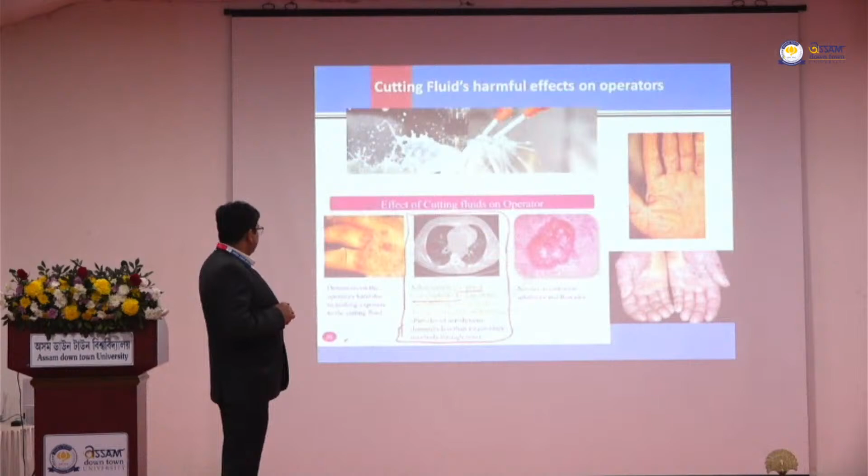And these are the effects of cutting fluid used in the industry on the operators. This is the representation by which we have tried to show the impact of cutting fluid pollution on the environment.

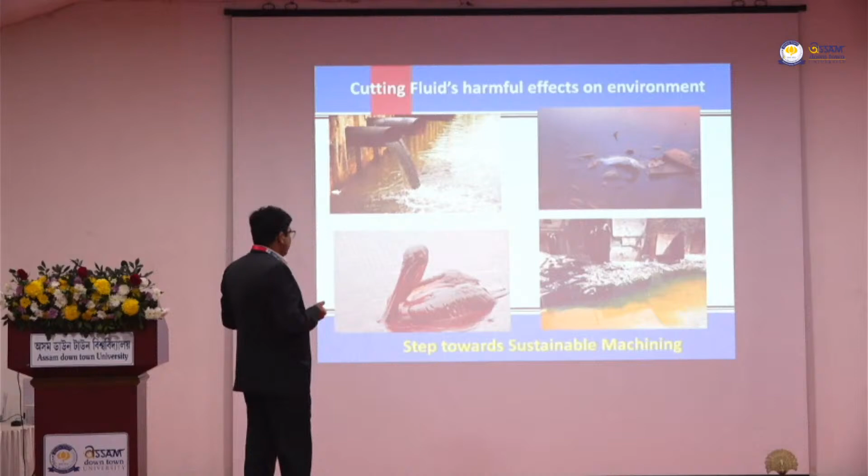So what is the step, how can we stop it? We can refer to sustainable machining - in 1987 the United Nations defined sustainable development. By the definition, development that meets the needs of the present - this is important - without compromising the ability of future generations to meet their own needs. It means we have to focus on optimization of available resources to keep resources for future generations.

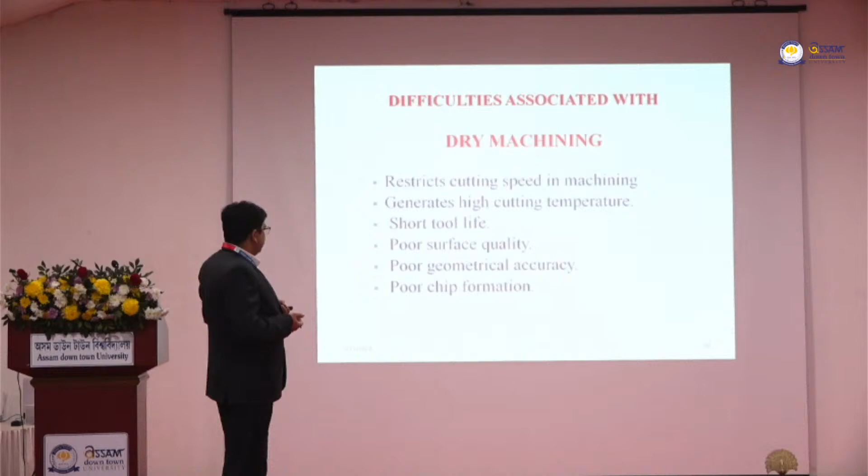So for that, what may be the best option? The best option may be dry machining. But dry machining has its own disadvantages, so we cannot eliminate cutting fluids from the metal industry. These are the difficulties associated with dry machining - we cannot compromise with quality, we cannot compromise with tool life. So it means dry machining is not the best option.

So there are different cooling techniques by which we can keep the temperature of the machining zone within the permissible limit, so that we can keep the sharp edge of the cutting tool, have lower cutting forces, better surface quality, and longer tool life. So I have focused on this particular area.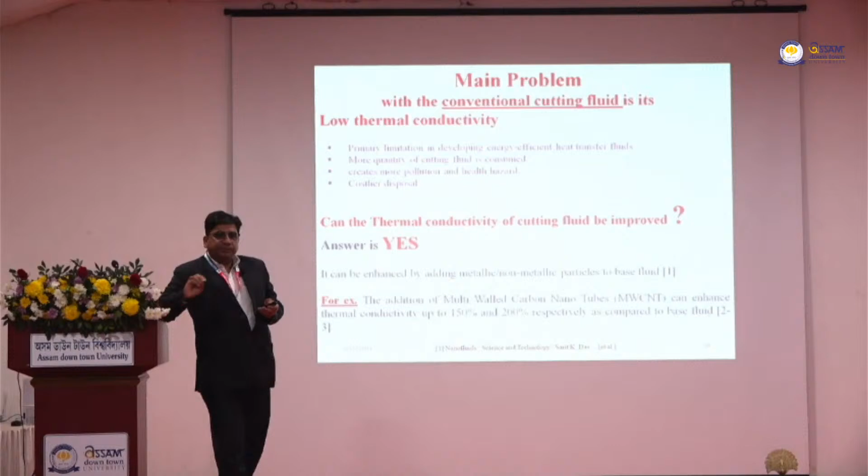Minimum quantity lubrication - this is the MQL technique. What is it? We don't use the lubricant in bulk, we don't use the flood cooling system. What we do is spray the cutting fluid with compressed air targeted at the machining zone, so that we can optimize the use of cutting fluid.

Secondly, we tried to enhance the thermal conductivity of the cutting fluid, so that to get the same effect, we can use a lesser quantity of cutting fluid. How was that thermal conductivity increased? For that we used nanotechnology. What we did and why we did it - that's important. Why we did it is here, and what we did we will discuss in later slides.

So thermal conductivity plays a very important role as far as the cutting fluid is concerned. Better or higher the thermal conductivity of cutting fluid, higher the extraction rate of heat from the machining zone. So we try to complement it.

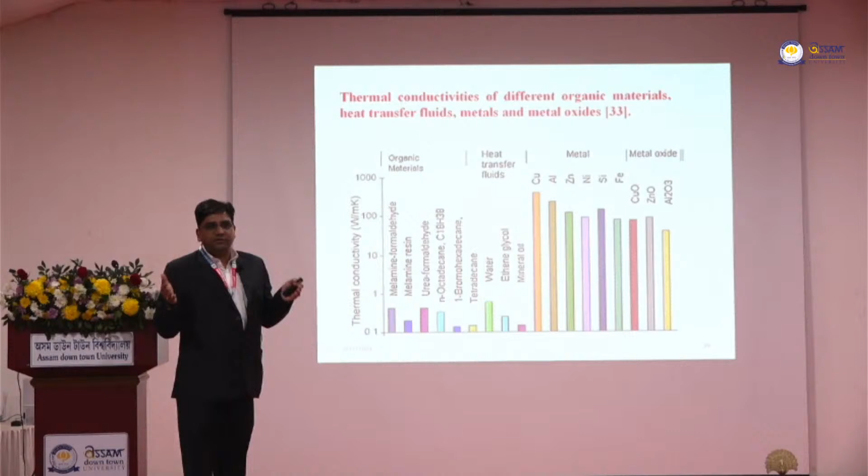You can see from here, as we compare copper, aluminum or other metals with water and other elements, the thermal conductivity is very, very high for copper. Copper has more than 100 while water has near about 1 thermal conductivity. So if we add two quantities of different properties, what do we get? We generally get the intermediate property value.

We will get the cutting fluid of higher thermal conductivity, and if we use the cutting fluid of higher thermal conductivity, it will give the better impact and it will reduce the consumption of cutting fluid for getting the similar type of effect.

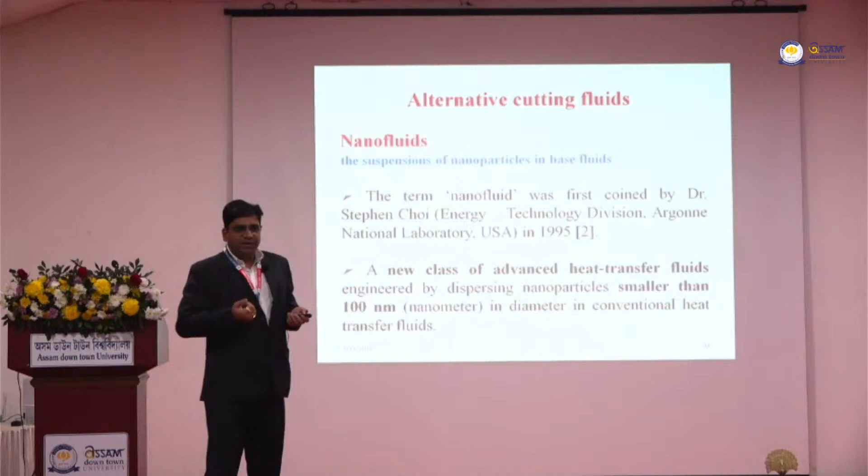So what are the benefits of adding nanoparticles into the cutting fluid? Basically, if we add some particles inside any liquid, depending upon their shape, most of the particles are spherical or similar to spherical in shape.

So they do direct effect and surface enhancement effect. If we have two bodies sliding over each other, and we put a third body just like spherical particles, it will create a rolling effect, and it will reduce the friction. As Dr. Katiyar told in the keynote lecture, sliding friction is always higher than rolling friction. So what we did here, we tried to incorporate the rolling friction, or replace the sliding friction with rolling friction. That's why we got the direct effect.

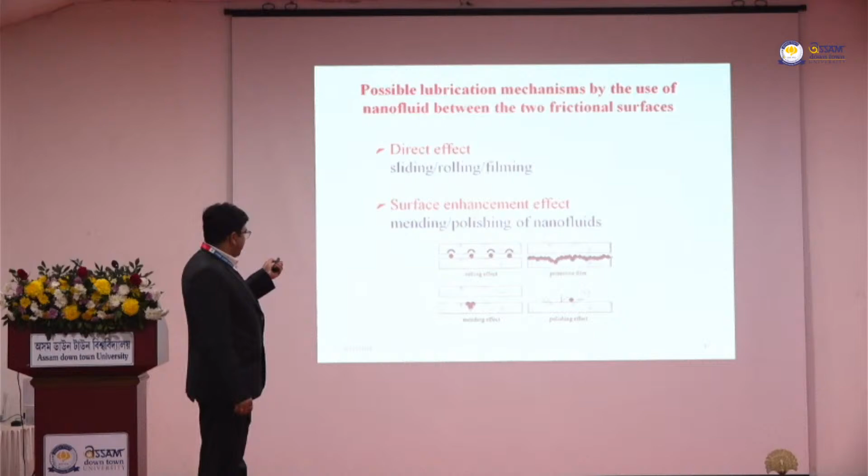And the second one is the surface enhancement effect. Surface enhancement effect means mending and polishing by nanofluids. We'll take this one by one. Rolling effect - everybody can understand, and a number of particles can come together and form a protective layer. So that is also the benefit.

This is the mending effect. While doing machining operations, when you are peeling or sliding something, the weaker zone can come out from the surface and it can make small pits. The nanoparticles can fill over that particular nano-sized cavity, and they can create a flatter surface as compared to the rough surface. So it is the mending effect, and this is the polishing effect.

If there are a number of rolling particles present, what they do is just like rubbing the surface with fine abrasives, so they create a little bit finer surface. These are the surface enhancement effects. So it means by adding nanoparticles into the cutting fluid, we got a better cutting fluid with higher thermophysical properties, and it created better results.

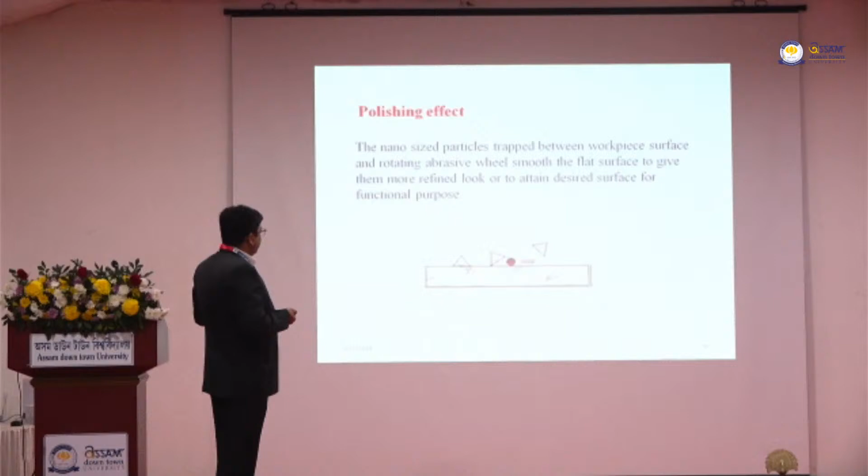So I am skipping all these things. I will just come to the methodology part - how did we do it?

First, we took 3 nanofluids: alumina, titania, and silica, depending upon the properties, because there are 2 important properties which cutting fluid should possess. First is the cooling property, second is the lubricating property. Titania and alumina have good thermal properties and thermal conductivity, and silica has good lubricating property. So we tried to investigate different nanofluids.

We did a literature review and found that researchers have used a number of nanoparticles, but after doing literature review, we found that these 3 can be taken for our investigation. Then we did the characterization of the 3 nanofluids - what are their properties, how their properties are affected by increasing or decreasing temperature and concentrations.

Then we did preliminary experimental investigations on how the addition of these nanoparticles into the cutting fluid are affecting the main response parameters: the 3 components of cutting force, the surface roughness, and the tool wear. So we investigated these machining parameters.

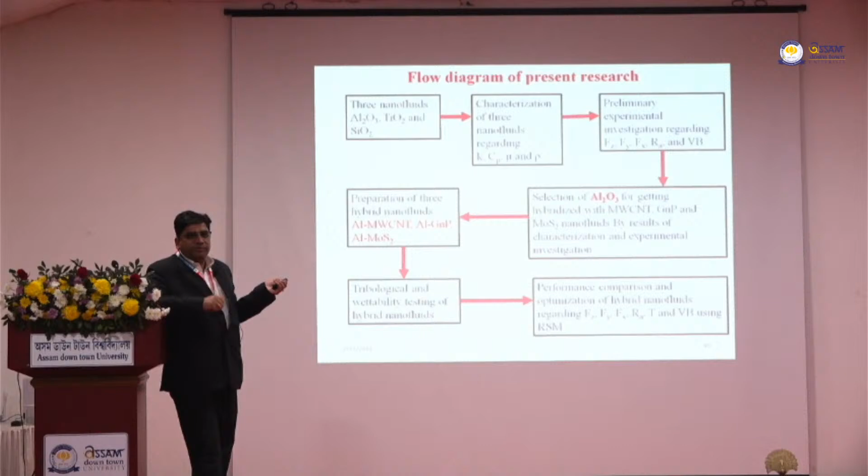So that was the overall summary. We tried to sum up the investigation by getting the value of what percentage this hybridization of nanoparticles improved the machining performance. So I am skipping some slides.

We did characterization of cutting fluids. Then we got some curves showing how they behave with the increase of percentage and increase of temperature. So I'm not going into detail.

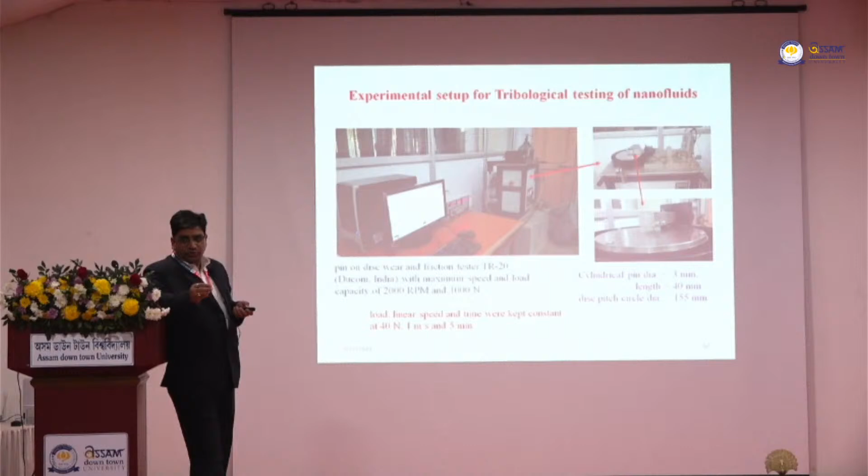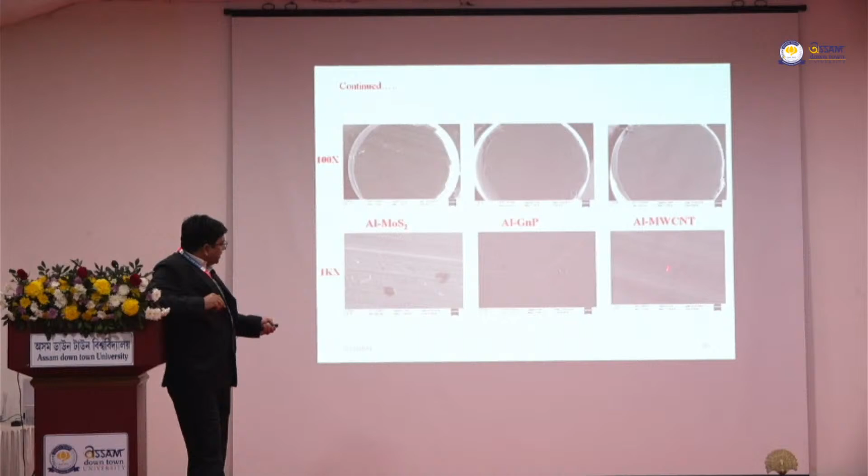Then we did FESEM. You can compare the images: in dry machining you can see how much roughness is there, but with alumina MWCNT you can see qualitatively better surface as compared to this.

Let us come back to the conclusion. So we did a lot of experiments. We optimized it. I am interested more into this.

You can see these are the machining parameters: cutting force, thrust force, feed force, roughness, temperature, and tool wear. We took six parameters, and with alumina MWCNT it showed the best result: the lowest value of cutting force, thrust force, feed force, lower roughness, a recorded temperature of 60.67 degrees centigrade, and the lowest tool wear.

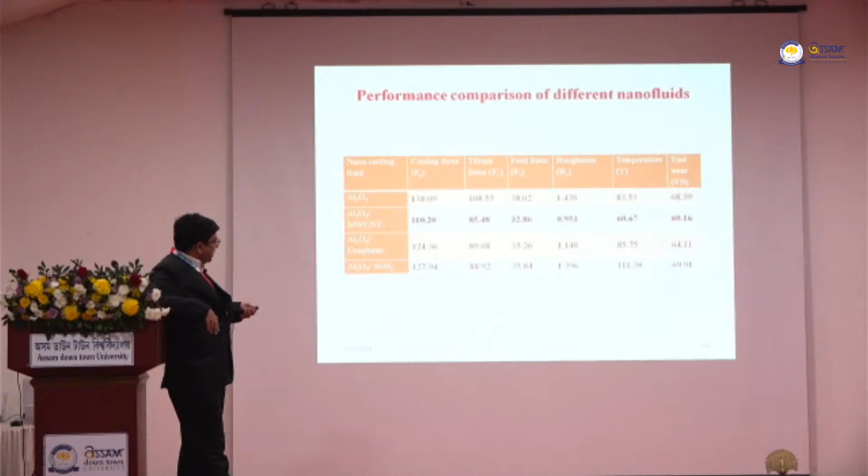If you try to understand using this: the application of alumina MWCNT reduced the cutting force, thrust force, feed force, and average surface roughness value. So all values are lower as compared to the other cutting fluids.

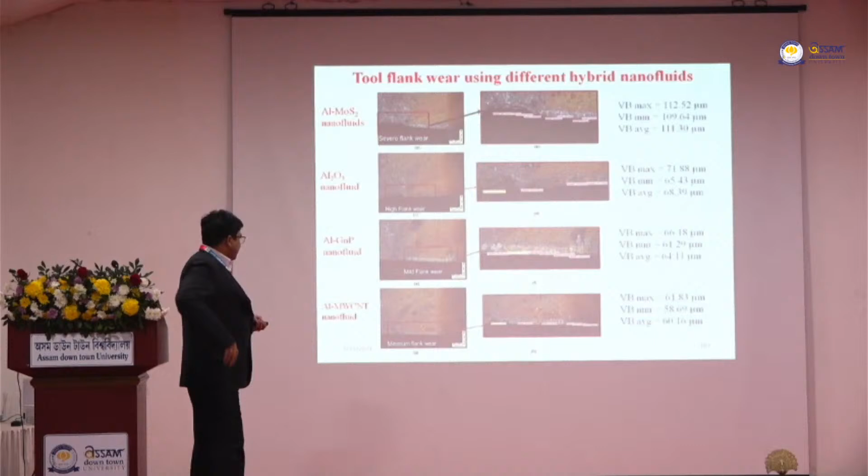So basically, these are the conclusions. Whatever I have told is all about the compilation of that work. The important thing is this - so what is the future scope? Where we are and how we can move forward, what we can try.

First, we did this on a fixed value of 90:10. The optimization of this nanoparticle concentration or mixing can be attempted - it might not be the best combination. The best combination may be 70:30, 75:25, 80:20, or whatever it is. So the optimization of this hybridization is still untouched.

Next, the conjugate heat transfer analysis I also did, but did not explain here. So that can also be attempted.

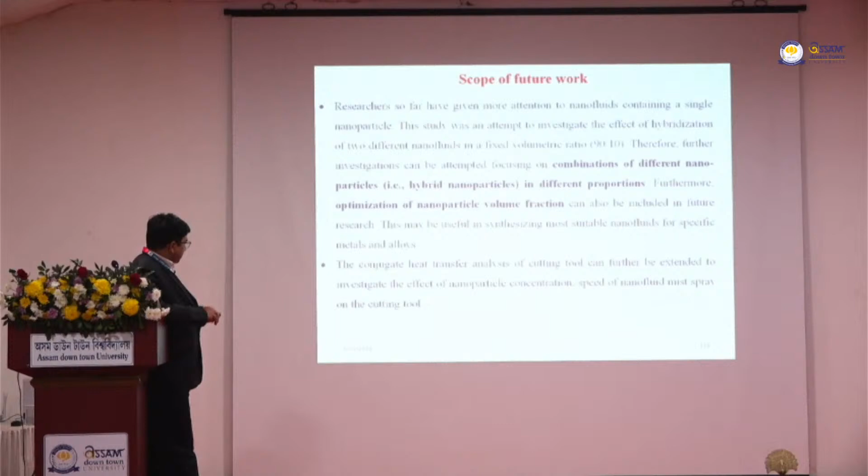But importantly, in the minimum quantity lubrication technique, we used a single nozzle for the MQL system, so the number of nozzles can be attempted. Flow rate of the cutting fluid spray can be varied and investigated. Spray distance, spray nozzle orientation, and air pressure can also be investigated - there are other parameters too.

Also, I have taken the spherical shape of alumina and other particles, but different shapes can also be investigated. Use of machine learning for the prediction of tool failure - many people are doing this work also, but it is not yet saturated, so it can also be tried.

CS students and other students can collaborate with mechanical students to develop some model so that we can predict tool failure before it happens.

And this is the system which we have already developed and for which we have got the patent - it is granted. So you can also do variations in this.

So development of a system which can regulate the flow of cutting fluid as per the requirement, based on the temperature of the machining zone. As per the requirement of the machining zone, you can develop a device smart enough to decide when and how much coolant is to be sprayed, with what velocity and flow rate.

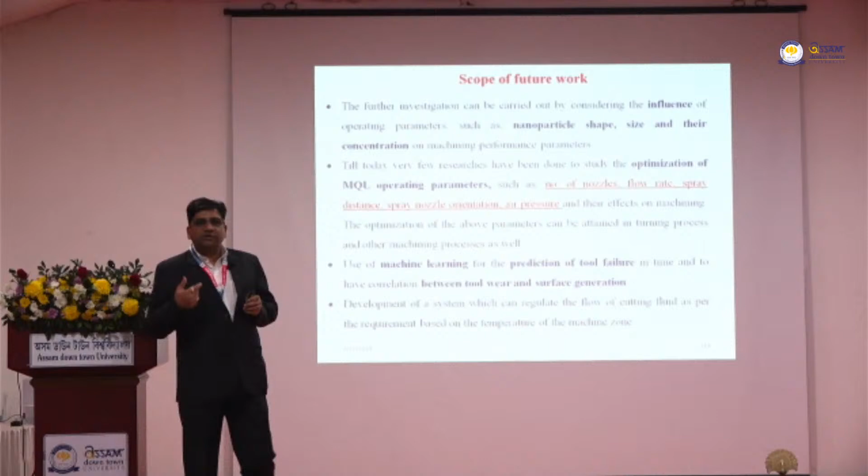So all these are the future scopes, and this one also - many people have done this, creating some contours and signatures on the tool rake face and all these things. But using the MQL system, you can also investigate this.